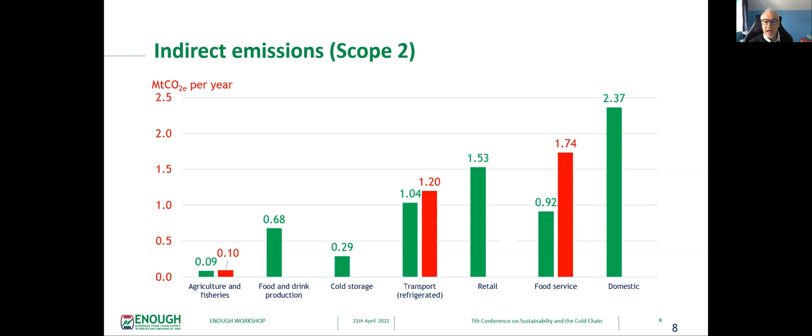Domestic here comes out as the maximum, 2.37. And that's because there are just lots of domestic fridges and the number of them swamps anything else. So the conclusions from this work are that more than half the direct emissions are from food retail, and half of that are from chilled centralized cabinets.

What I showed in the previous presentation this morning was actually I split the emissions in terms of the different pieces of equipment, but I didn't really have time to do that in this presentation. And from that, you could see that from the direct emissions, it was mainly the cabinets that you can see a picture of on the right, it's chilled retail display cabinets, so the big one, effectively.

And also, the majority of indirect emissions are for domestic fridges. And once again, I haven't shown it in this slide, but it was in the previous presentation, that more than half of that are from fridge freezers. And that's really because most people have fridge freezers in their home. So more than half of the fridges in people's home are fridge freezers. So it adds up to a great amount of energy consumption or emissions.

So the next step in this work is to look at all food-related emissions. This was just refrigeration. So we're extending it to gas for heating and cooking, and even heating and ventilation systems as well in kitchens, etc. And also to expand it from the UK to the EU. So we're looking at the emissions in the whole of the EU.

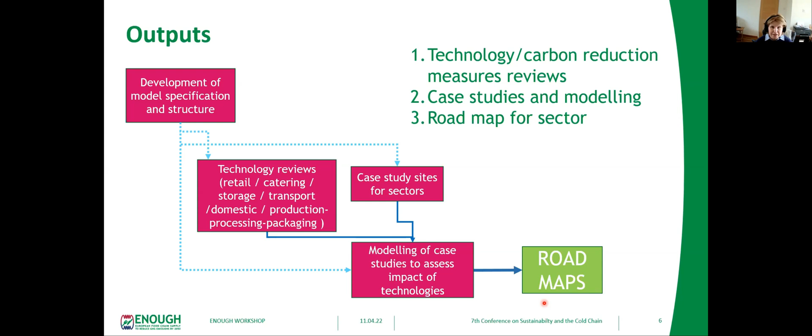We also need to be able to create those roadmaps. So we can look at what the technologies and initiatives can actually do, but we have to identify how they work together and what the potential is. So we're using case study sites from different sectors, which we'll then model, and we'll be able to look at the impact of those technologies on those case study sites. And from that, our aim is to create different roadmaps to be able to see where people are on the journey through to reducing emissions, and to see maybe what the next step is in that pathway for them.

So in terms of the assessment of the technologies and measures, we're assessing the technological and non-technological. So we're looking at operational behaviour measures to reduce emissions. And we're looking obviously across the whole of the cold chain. One of the things is you have to be very clear on the boundaries that you're looking at. The first sector we're looking at is supermarkets. And you can see a rather simplistic diagram here. And so we've got to be clear that we're looking at the building of the supermarket itself.

So the building envelope. We'll exclude things like food service and cold stores because they come into other sectors, but we're definitely looking at the display cabinets. We're definitely looking at the hot cabinets in the store. We're looking at lighting, people and infiltration. We're looking at the building itself. And we're looking at the HVAC systems as well, whether that's heating or cooling, which may be different in different parts of Europe. And also looking at the non-public area as well. So you've got to be quite clear on where our envelope lies.

And the idea is that we will critically review the information on the technologies and non-technical aspects. We'll assess what information is available, how much it costs, how long it takes to apply. And so that will help us create those roadmaps.

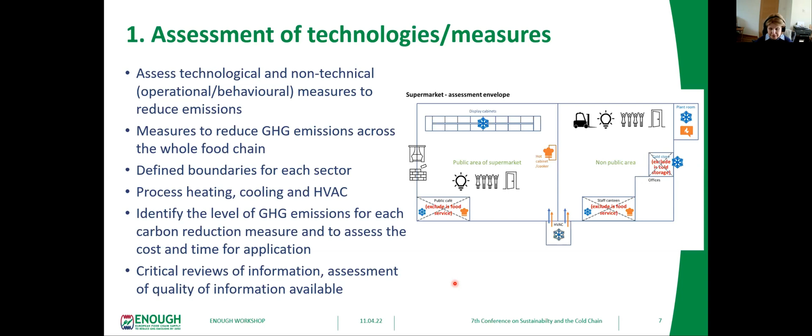The next stage is the case studies and the modelling. The idea, if possible, is to identify 2 to 3 case studies from each partner country involved in the work package per sector. We need quite a level of detail to enable the detail we need in the modelling. But we need to really be able to assess what the impacts are of applying different technologies in different regions over different seasons and the interaction between technologies.

For example, I've tried to show some of the nuances across here. So if we have carbon emissions, this is reducing emissions, that's increasing emissions. So for example, if we put doors on cabinets in supermarkets, it would save carbon emissions. I don't think there's much doubt about that. The level may be open to debate, but we will save carbon. But on the other hand, in some locations, if we're no longer cooling the store by having open-fronted cabinets, we might then have to provide more cooling through the store via the HVAC system. But that only may be in some countries in Europe.

Also we may apply a refrigerant. It may use more energy, but it will have less emissions, for example. So there's always impacts. We could reduce the store temperature, which would reduce energy, but that might actually take some energy to do that.

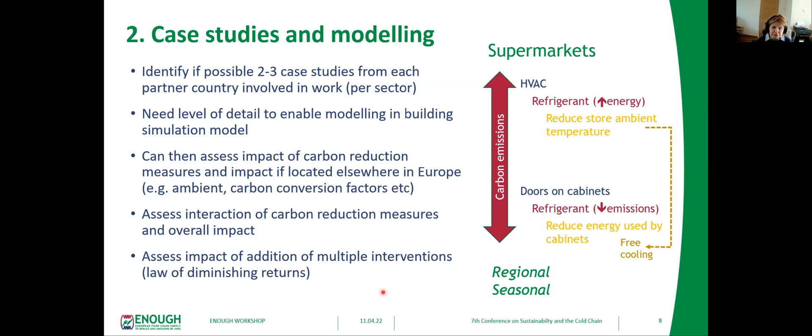From that, we'll create roadmaps. They'll be based on carbon, energy saving, cost and time. And we may have to create different roadmaps for different locations in different countries. But the idea is that through these roadmaps, users will be able to identify where they are on a decarbonisation pathway and see the next steps that are appropriate for them. So not everybody, for example in a supermarket, may have the absolute best technology that's available today, but people can see what the next step might be for them on their journey down that road to decarbonisation.

So that's really just a quick run through what we're going to do. We're just starting on the work on the retail, and then we'll be moving on to other sectors. The next one that we're dealing with is food service and then food storage.

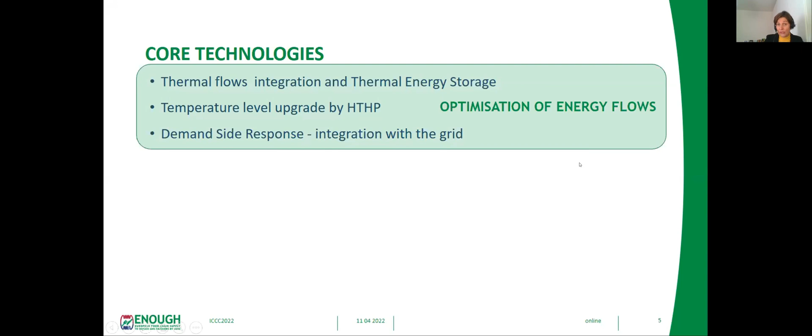We know that we have also to work together with the grid, so we need to integrate our activities with the grid, especially when we are using renewables. So we have a first big family, which I've called optimization of energy flows.

Then if we want to pursue sustainability in the long term, we know that we need to use fluids and materials that will not have any impact towards the environment, not today and not even tomorrow. So we need to use natural working fluids and materials which are sustainable in the long term. So sustainable, I would say, forever. So we have a second big family, which is use of sustainable fluids and sustainable materials.

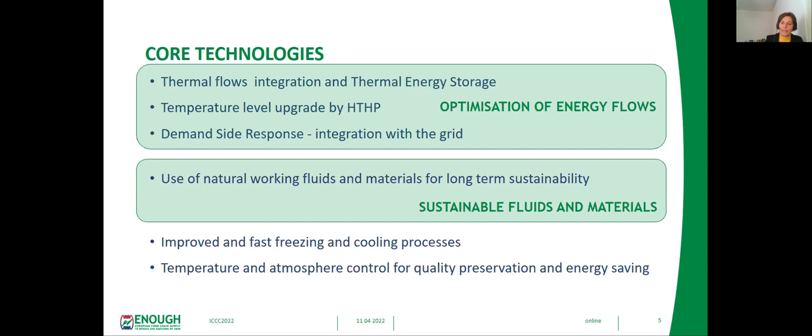And finally, we have seen that food waste is a big problem for emissions. So for sure, we need to improve our processes. We need to improve freezing and to improve cooling. And these processes need to be efficient on one side, but also to promote the quality of the food, so that we can preserve food in a better quality and for a longer time, so that we can avoid food losses. So these are the three big families of technologies.

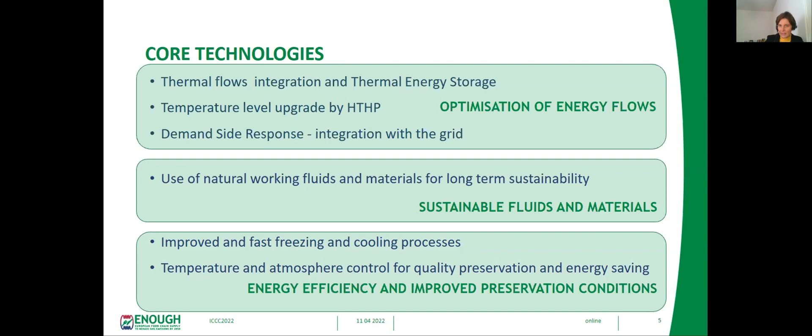We have this big family we called others because we have seen in the previous presentations that we have other sectors that are highly energy demanding, like, for example, beverages and cooking, baking, and so on. So there is room for other demo cases. We are still missing 6 of them. So I will now go into details to show the demo cases that are now running within the project. And please keep in mind that you can find these details about each of these cases in our website, and you can also find contacts of people of the institution and the leading partner for each of these demos.

We have, for example, this high temperature heat pump, which is intended for meat and can produce steam at 150 degrees. It's combining absorption and vapor compression cycle. It can provide cooling and heating, and it is suitable then for the replacement of fossil fuel boilers. We need also to keep in mind that we are now trying to demonstrate each of these technologies within a specific sector or product. But one of the goals of the project is also to try to find synergies and to see which of these specific technologies can be exported to other products or other links of the chain. So this is also one of our activities, to try to see integration and synergies between different sectors and products.

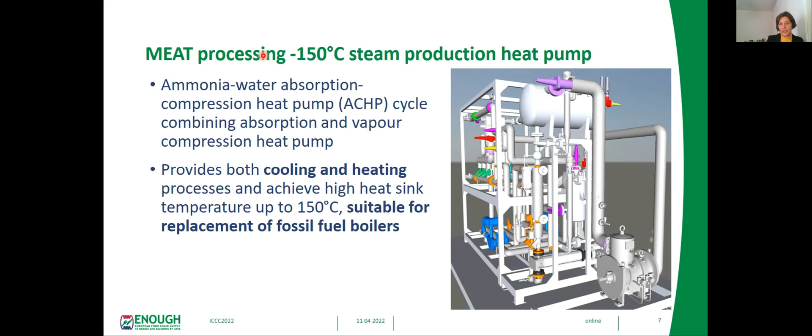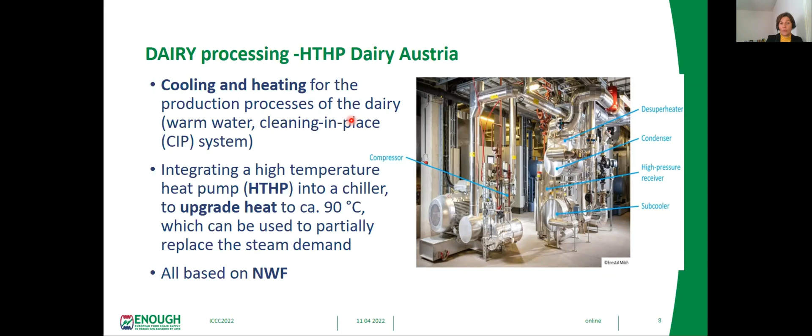Dairy is also well demonstrated within ENOUGH. This is an example of what is going on in Austria. Dairy processing normally requires cooling and heating, for example, for cleaning in place or in general terms, hot water. And this system is based on natural working fluids. It's based on ammonia, and it's integrating a chiller with a high temperature heat pump, which is upgrading it to 90 °C. And this heat is then used to partially replace the steam demand of the site.

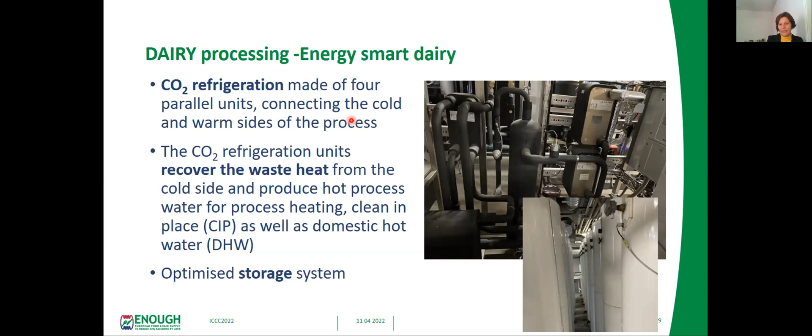We have another dairy processing site in Norway, where we are still using a natural refrigerant, but this time it's CO2. So we have 4 parallel units that are producing cold and hot, and the recovery of the waste heat is used for cleaning in place and for domestic hot water production. We have also an optimized storage system just to decouple the heating and cooling demand.

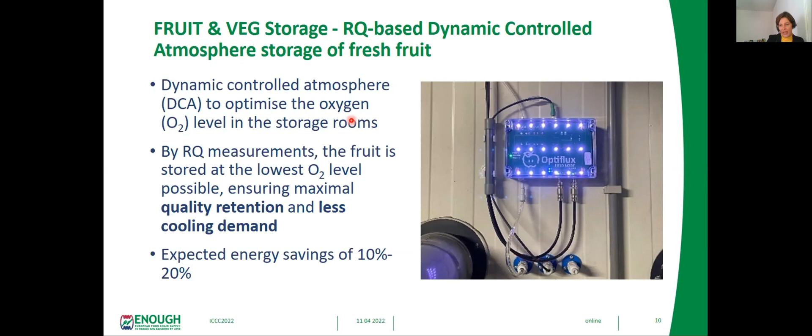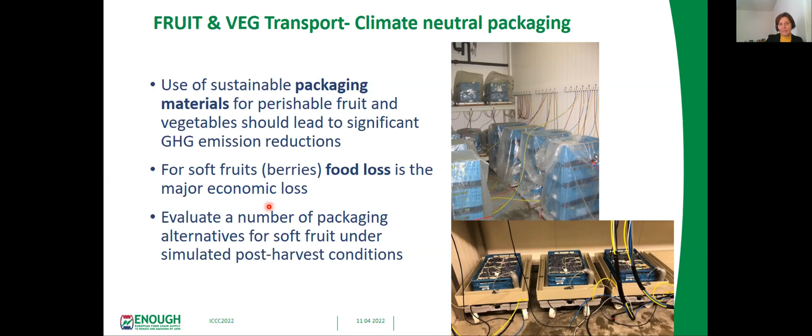This is again another demo for fruit and vegetables, and it has to do with materials in this case. So we are trying to use only sustainable materials for packaging, and this is a very specific application because we are dealing with soft fruits, berries, and in this specific business sector, the food loss is the major economic loss. So packaging has the greatest importance. So we have sustainable packaging, which has to assure the quality maintenance of the product.

And finally, just a few words about transport. We have seen that transport is responsible for a lot of emissions. And in this very last period, we have seen how the importance of short distance transport, so the last mile delivery, has increased due to the COVID pandemic.

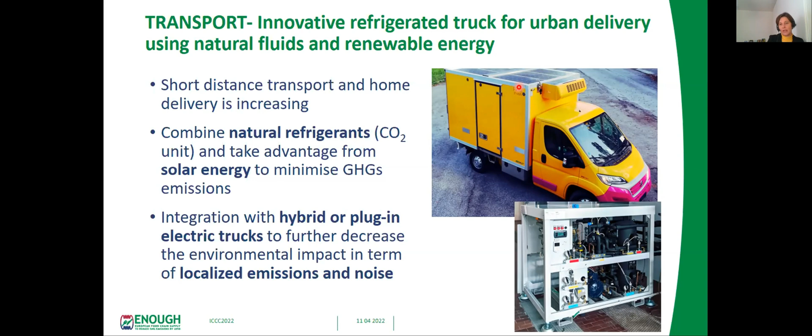The idea is to combine natural refrigerants, so refrigeration cooling units working with natural refrigerants, in this case CO2, with, as you can see on the top of the truck, PV panels, so with the use of renewables to reduce the emissions. This can be also combined with hybrid or plug-in electric trucks to further decrease the environmental impact. And this can be intended in absolute terms, but also in terms of avoiding any localized emission and noise when working, for example, in city centers.

So these are examples that, as I said, you can find on our website with all the details and also the contacts, but we have more on the way. So we have other demo cases where we are displaying smart technologies for the decarbonization of the food business. We are working on optimized display cabinets for retail, where we combine thermal energy storage and demand side response.

We are working with domestic. On one side, we have the improvement of domestic refrigerators, so some kind of combination of a traditional way of storing food with advanced technologies like variable speed drive and electronic expansion valve. On the other side, we have also a different approach. For example, we are proposing long-term storage with vacuum freezing, also done at home, which is not typical of the domestic market at this time. So also, let's say, an innovative approach to storage at home.

And we have some new demonstrators planned. Optimized heat recovery from large refrigeration systems. We know that heat recovery is a key technology for using waste heat and for decarbonizing the sector. And in addition to this technology, we have other demonstrators that are coming soon, and they are mainly working on energy